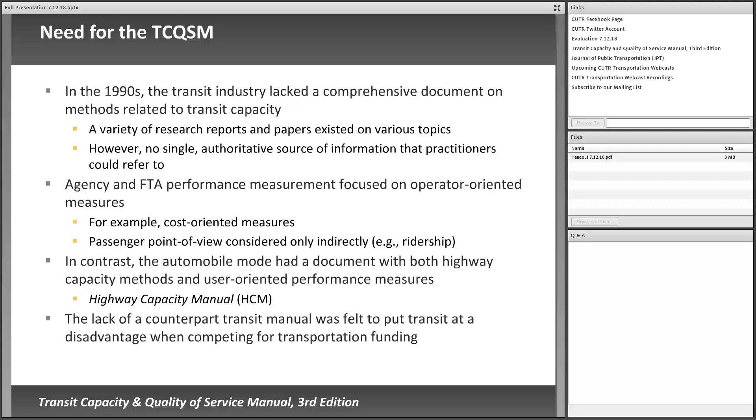In contrast, back in 1950, the auto mode had the first edition of the Highway Capacity Manual and its associated capacity calculation methods and user-oriented performance measures. And hence there was a strong feeling that there was a need to have a transit manual as a counterpart when competing for transportation funding.

So in terms of the TCQSM development, there have been 3 editions to date, starting with the first edition in 1999 that was just published as a web document. At that point in time, it just was a synthesis of the previous research. It did introduce a quality of service framework for the passenger's point of view for the first time. The second edition, which emerged 4 years later, actually applied the quality of service framework, incorporated some gap-filling research, added a chapter on ferry capacity, and at that point in time became TCRP's best-selling report.

And then 10 years after that, in 2013, the current edition, the third edition, was published. At that point in time, there was work done through a series of focus groups to start to get input from users of the second edition, what they would like to see in the next edition, what were some of the shortcomings of the second edition, what added things should be addressed. In the third edition, there was also some added TCRP research that was funneled into the third edition.

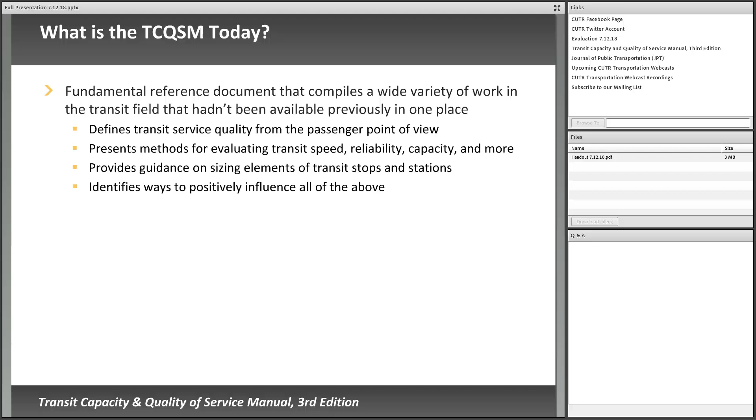The intended audiences are several, ranging from transportation planners to traffic engineers, transit operational staff, design engineers, researchers, and students. Several universities, particularly those teaching graduate transit planning classes, are now using this as a primary textbook for its ability to provide a lot of information and guidance on the basics of how to evaluate transit capacity and quality of service. Another key thing is that the document includes all conceivable transit modes.

In terms of potential applications, we've identified seven of them on this slide, ranging from training staff new to the industry, to university students. It's a very important reference document. There is a glossary, the most comprehensive glossary related to transit terms that has been developed. It provides guidance on use of simulation, application of transit preferential treatments on urban streets, how to incorporate passenger quality of service and service standards development, how to apply the concepts to do service evaluation, what-if questions. There are a lot of examples in the document illustrating how to apply the principles and methodologies included, for planning and design applications ranging from sketch planning all the way into alternatives analysis, as well as specific modal facility design.

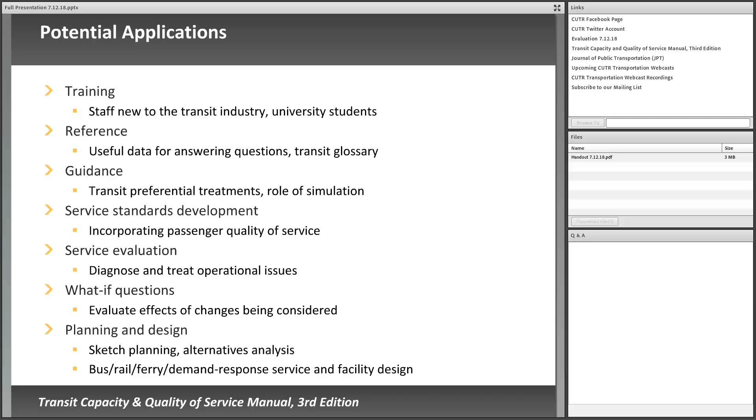As I mentioned, there are five key concepts presented in the manual. The first one is quality of service. In this manual, it's intended to reflect the passenger's point of view, and it's intended to supplement operator cost-based measures that historically had been applied by agencies to evaluate the effectiveness of their services. Again, it's critical that there be a balance between the service passengers would ideally like to see, and what operators can afford to provide given the overall service demands.

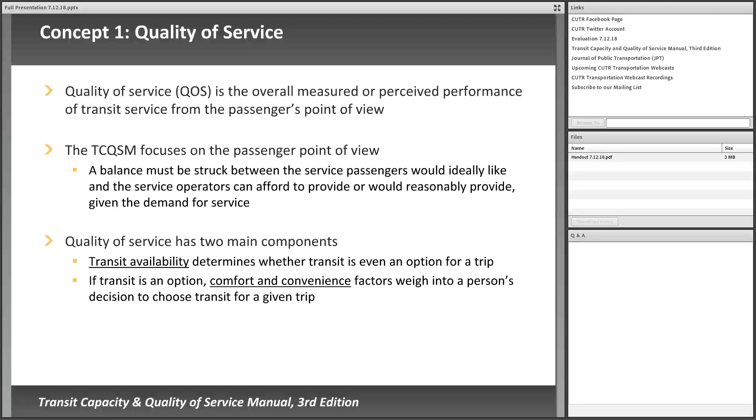Quality of service has two main components: transit availability and comfort and convenience. Availability is whether transit is even an option for a trip, and if it is an option, what are the comfort and convenience factors weighing into a person's decision to choose transit for a certain trip.

Moving on to capacity - there are various definitions of transit capacity, but the basic concept is to identify the maximum number of vehicles, persons, or both that can travel past a particular location in a given period of time under specified conditions. This ranges from maximum or theoretical capacity, which normally isn't used for planning and design - because maximum capacity assumptions would result in unstable operations, similar to the level of service F scenario on the highway side - versus what's known as design or achievable capacity, which is really the focus of the TCQSM procedures.

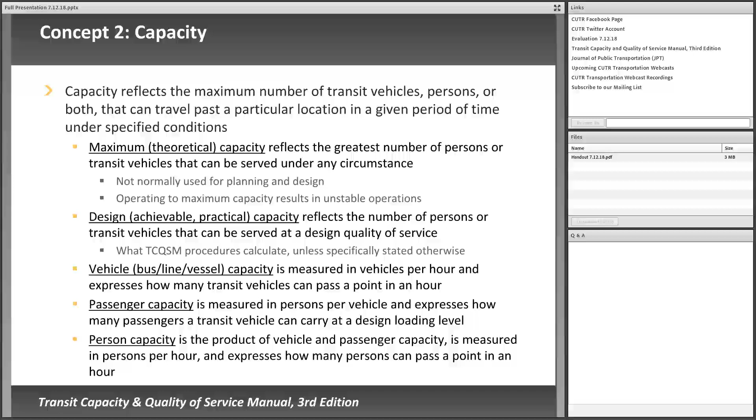You also have capacity broken out by vehicle type, whether it's a bus, a rail line, or a ferry vessel. Also, passenger capacity for certain types of vehicles for various modes, and then multiplying vehicle capacity times passenger capacity to get person capacity. All of these are further identified with respect to each of the modes in the document.

Concept 3 relates to speed and reliability. It's not addressed in the title, but speed and reliability are certainly influenced by transit capacity. Even though small and mid-sized agencies generally don't have capacity issues, speed and reliability are important considerations for agencies of all sizes.

Travel time and reliability do have an influence on mode choice and satisfaction with transit service. Speed and reliability influence the number of vehicles needed to provide service on a route at a given headway, which then impacts route operating costs. Reliability is being addressed in a current TCRP project, the A-42 project, which is assembling a reliability guidebook related to fixed route bus service that will serve as an input into the 4th edition of the TCQSM.

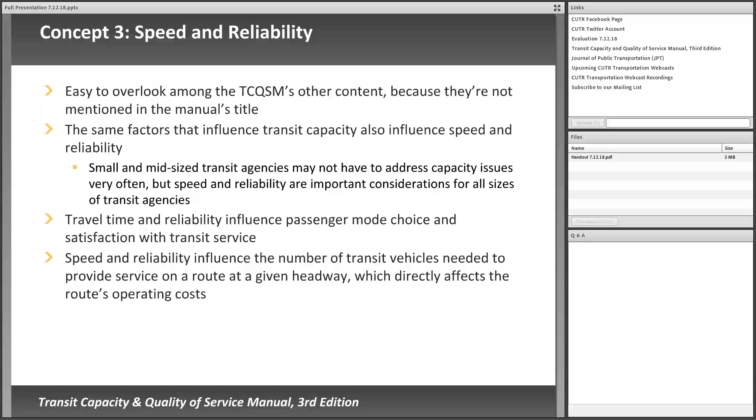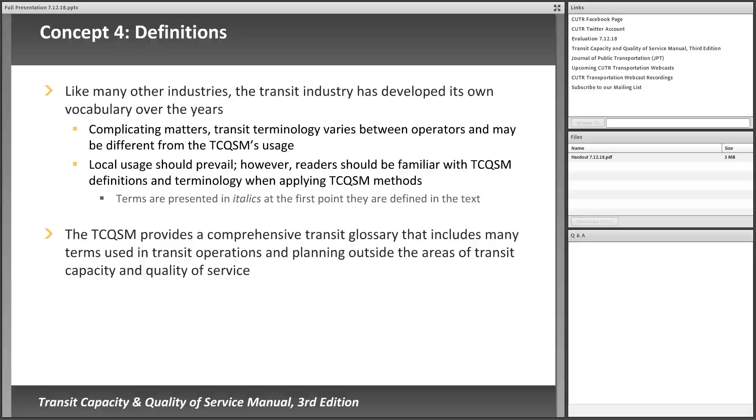Definitions as a 4th concept. The manual has, as I had mentioned before, the most comprehensive glossary of terms in the industry in any document. One of the things it also provides is guidance with respect to applying default values for different concepts and measures versus local values if available, stressing that local usage should prevail. But a very interesting section with respect to definitions in the document.

Local data: the manual over time has evolved to provide a real good source of physical and operating characteristics of a wide variety of transit modes: bus, rail, ferry, ropeway, and with respect also to ridership associated with different modes and levels of service, as well as applications of equipment and technology and the like.

Right now, the 4th edition, as envisioned when it's put together in the next few years, will probably include a component on automated vehicles and connected vehicle technology, which wasn't in play back when the third edition was put together. But again, illustrating that local values should be applied as inputs to TCQSM methods where possible, though there are a series of default values available.

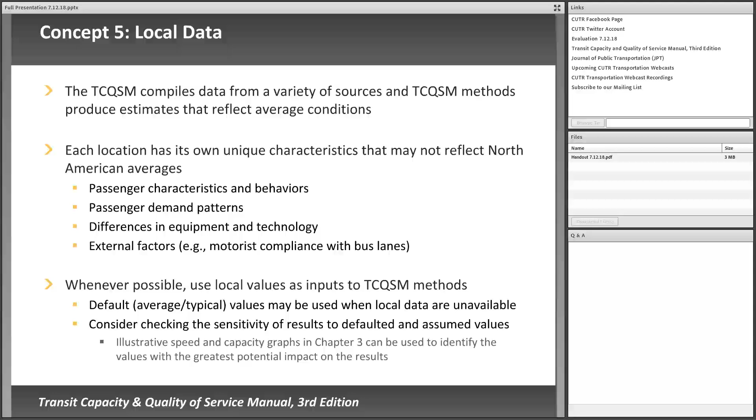So what's included in the TCQSM? There's a total of 12 chapters broken out into 4 major sections. There's a user's guide up front, which is very helpful, and then 3 chapters related to concepts, modes and services, operations, and quality of service, and then 6 chapters related to modal calculations of capacity, as well as a quality of service chapter across all of the modes, and then 2 reference chapters, one a glossary and then an index of terms.

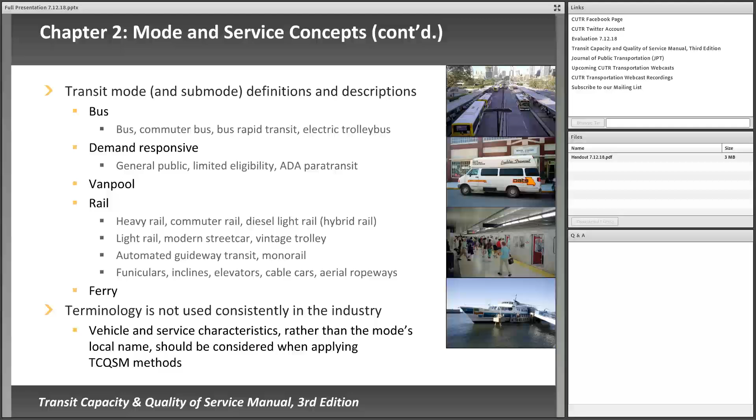It breaks out mode and sub-mode definitions for different types of bus service, breaks out demand response service from fixed route bus, van pool, all of the potential rail modes, as well as ferry service.

It also talks about operating these modes in different operating environments: mixed traffic, semi-exclusive, exclusive, grade separated. For example, semi-exclusive would include what's known as the BAT lane concept that's being applied related to quite a few of the bus rapid transit lines around North America, where you've got right-turning vehicles sharing the lane with buses. That's addressed, as well as these others.

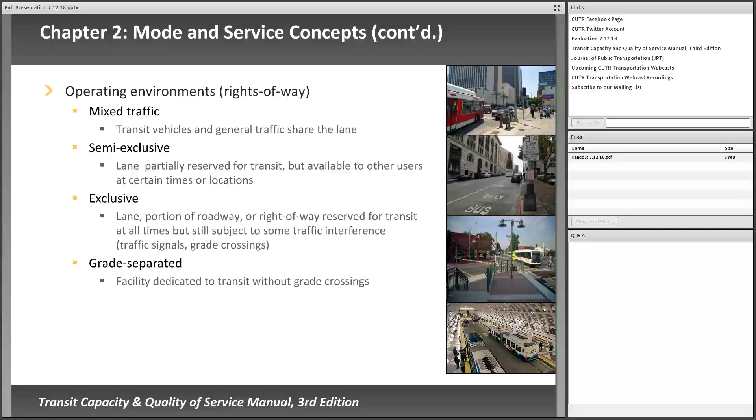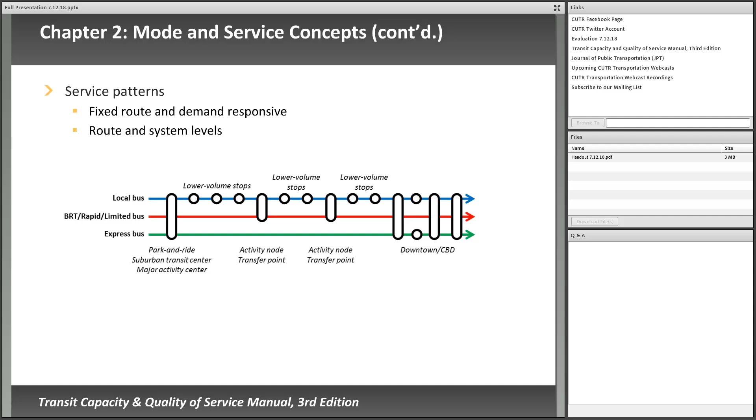Different service patterns are discussed. This graphic on this slide shows you differences in stop locations with respect to local bus, bus rapid transit or limited bus service, and express bus.

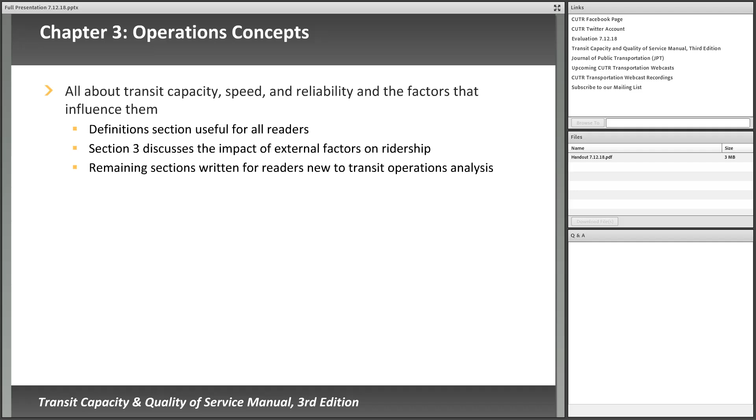Moving on to Chapter 3, Operations Concepts. Again, the focus here is talking about all of the capacity, speed, and reliability concepts. It includes estimating impact of external factors on ridership.

Why is transit capacity important? Well, certainly, as I had mentioned before, the factors that influence capacity also influence speed and reliability, which subsequently impacts operating costs, passenger satisfaction, and in the end, ridership.

It helps with respect to managing passenger loads and design standards for that, understanding the impact of operational changes that impact dwell time and the speed and capacity. Special event service planning as well as something that's addressed in the manual in this particular section.

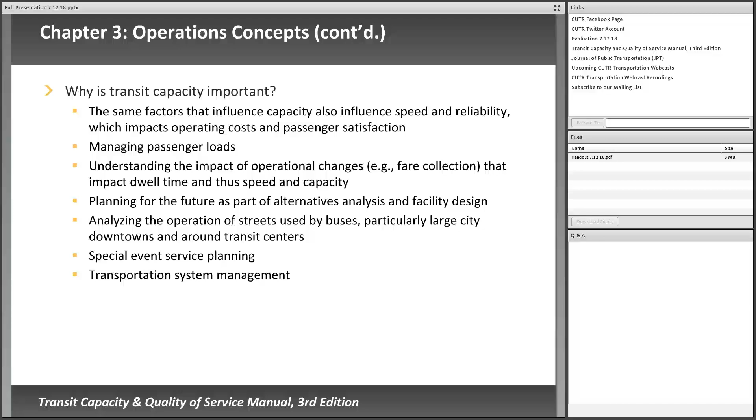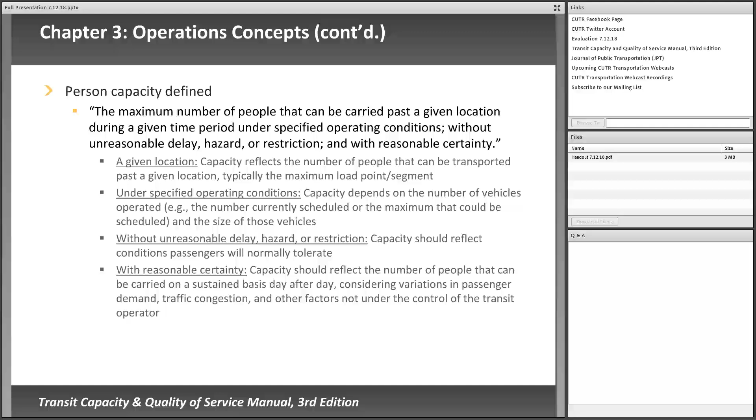Person capacity, I've already talked about that. Again, it's the maximum number of people that can be carried past a certain point under a certain time period. And again, all of the factors involved with that particular definition.

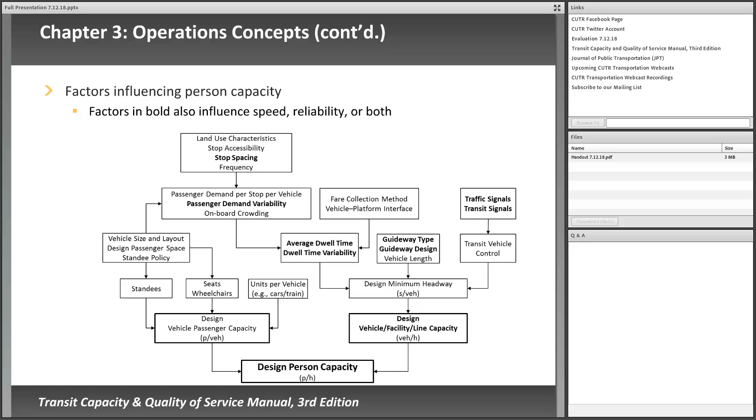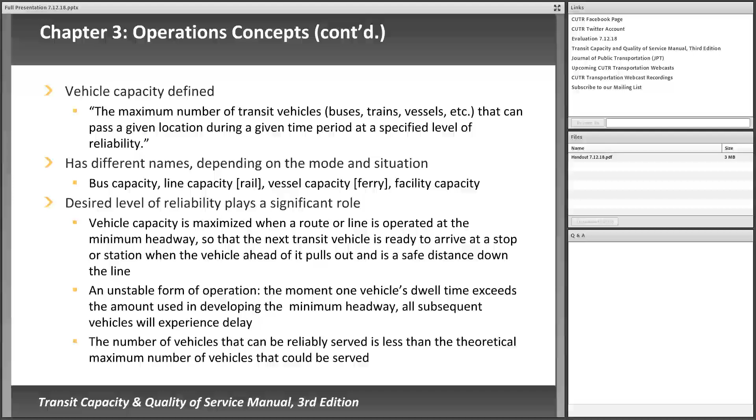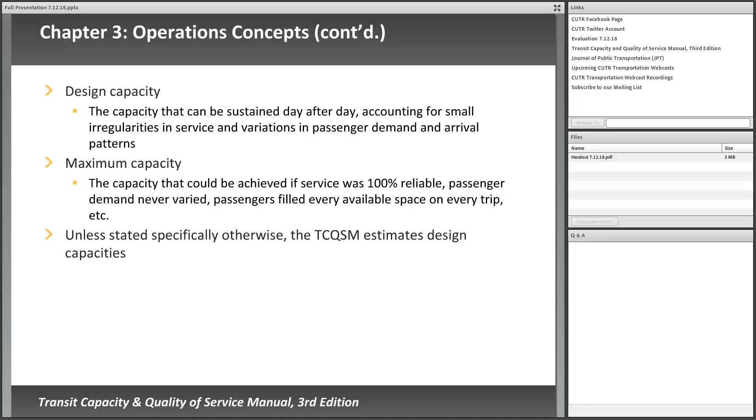And then those combined would be design person capacity. So vehicle capacity, I've already defined that. Again, it's defined by different names based on the mode and situation. You have line capacity, typically identified for the different rail modes, vessel capacity related to ferry and the like. And again, I've mentioned the concept of overall design capacity, which the procedures of the TCQSM focus on, versus maximum capacity.

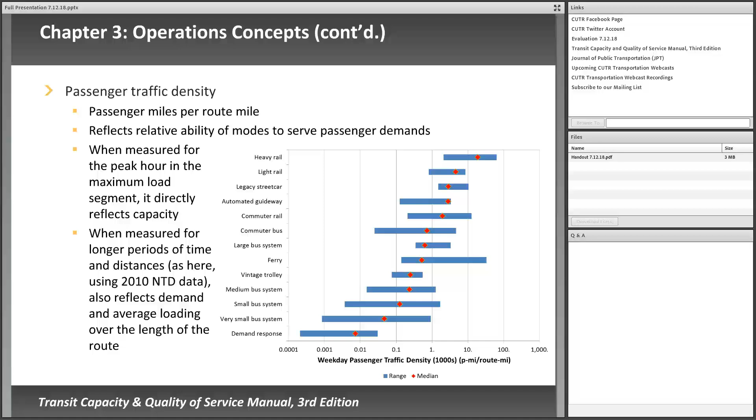When it's measured for the peak hour in the maximum load segment, it directly reflects capacity, and if it's measured for longer periods of time and distances, it's more reflective of overall demand and average loading over the length of a route. But again, there's a series of bar charts related to different concepts in this particular chapter, like this one. And again, another flow chart on various factors influencing transit speed.

You have... grab that. Doesn't want to come down.

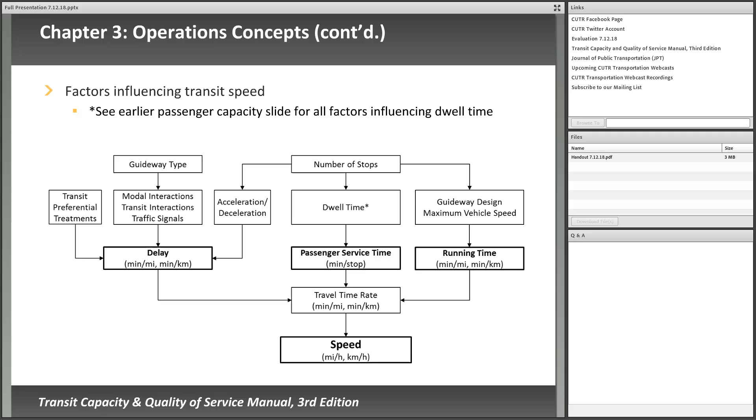Okay, you have everything from a guideway type initially to number of stops and how you would work through the calculations to apply the impact of transit preferential treatments, acceleration, deceleration characteristics to identify overall delay for the vehicle related to the guideway type, and then based on the number of stops, dwell time, which then translates into passenger service time, running time. They all end up identifying a travel time rate and then speed in the end being estimated.

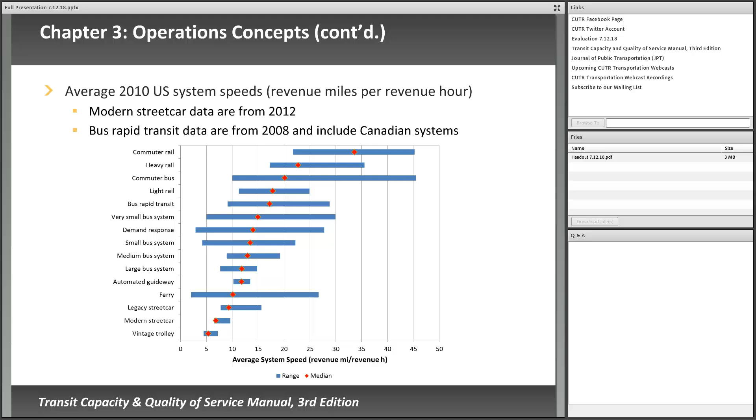And then this is another bar chart that shows the variation, and again, this is back in 2010. Remember, this document was published in 2013, so we have a little bit dated values, but still pretty applicable when you look at things in total. These are values coming out of the National Transit Database at the time, but you can see the average system speed, revenue miles divided by revenue hours for the different modes.

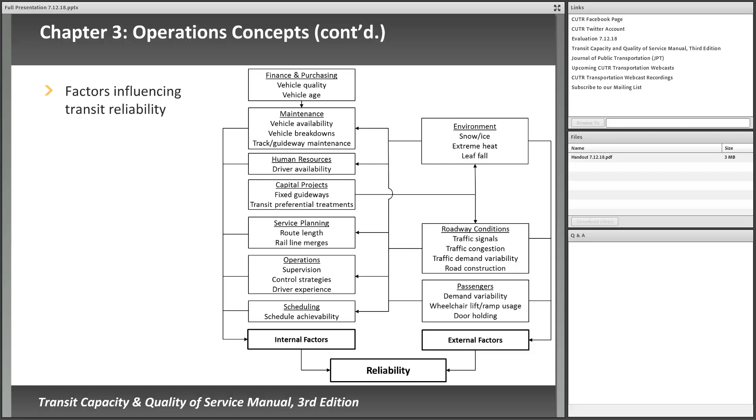And again, this particular chart, which has been modified and enhanced and is going into the new reliability guidebook being assembled, shows you all of the different factors influencing transit reliability with respect to internal factors that the transit agency has under control versus those external factors such as environment and roadway conditions that the agency does not have control over, both of which need to be addressed to address reliability.

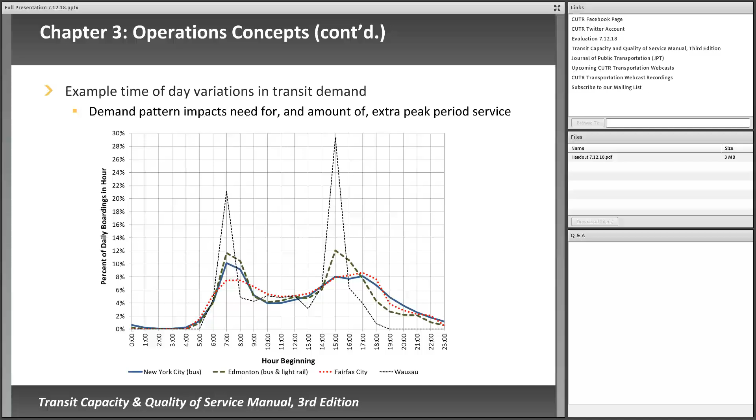And then there's a series of graphics talking about the impact of time of day variations and transit demands, where there are different demand patterns related to different types of services in different locations. You see in this particular slide that Wausau, Wisconsin, that has a particular major manufacturer in town, has more peaking of local bus service than in some of the other cities, particularly New York City. You can see the difference with respect to time of day variation.

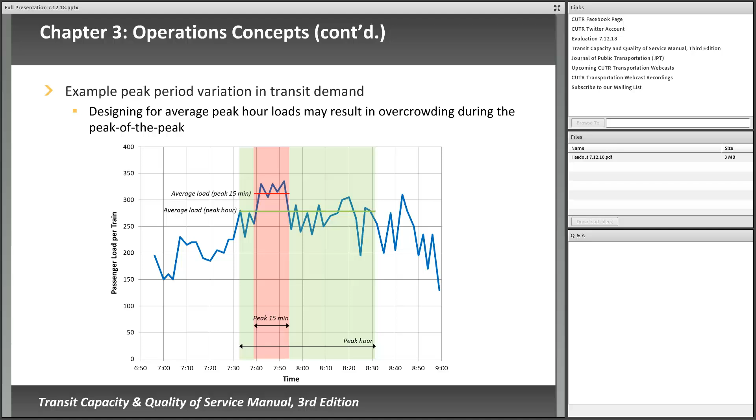It's important to realize that there can be different peak period variation in transit demand. Designing for average peak hour loads may result in overcrowding during the peak of the peak, hence a balance with respect to what you should be designing for.

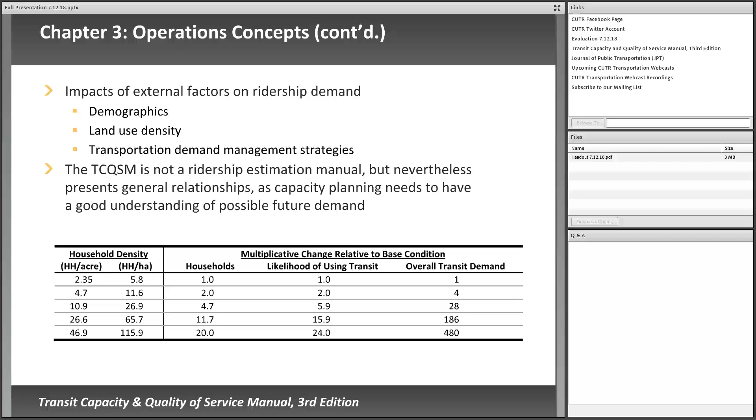Also, what are some of the external factors on ridership demand in the chapter? It's important to realize that the manual is not a ridership estimation manual, but does present general relationships of demographics, land use density, and TDM strategies on potential future demand. This particular table shows the impact related to the base condition of different densities on the likelihood of using transit and overall transit demand.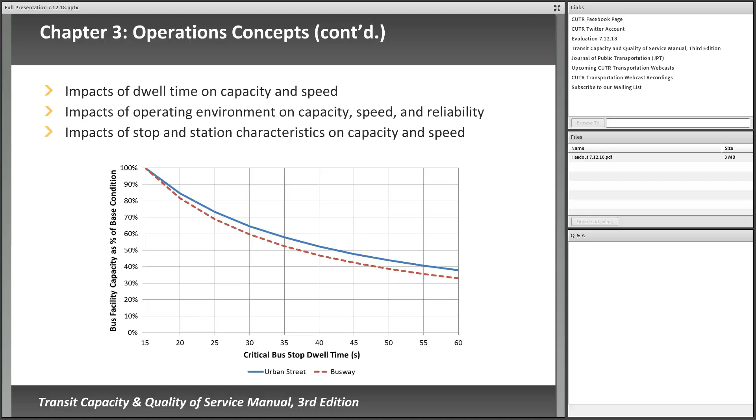Also, how critical bus stop dwell time can impact bus facility capacity, where a critical bus stop, if it has a high dwell time, can really drive the bus facility capacity on a street, impacting the actual headways and the bus bunching involved.

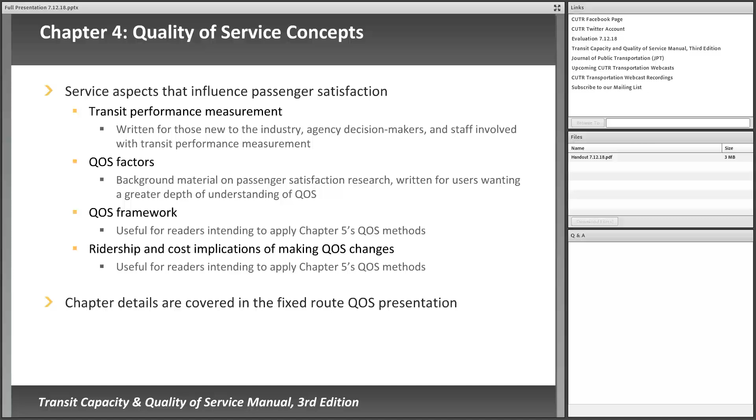Moving on to Chapter 4, quality of service concepts, with respect to addressing a broader set of transit performance measures, and then within that a smaller set of quality of service factors and a framework. Again, quality of service measures based on availability and also comfort and convenience.

How to measure quality of service for fixed route transit, some of the methodologies that have been applied to do sub-area assessment as well as corridor level evaluation, including multimodal transit level of service. There's been some separate national cooperative research program work on multimodal level of service analysis on urban streets. The manual inputted the transit component of that into that particular separate research effort, but that's provided with respect to insights in the manual.

Demand response transit quality of service, particularly with respect to service availability, is identified. And then a lot of potential application examples are included in Chapter 5.

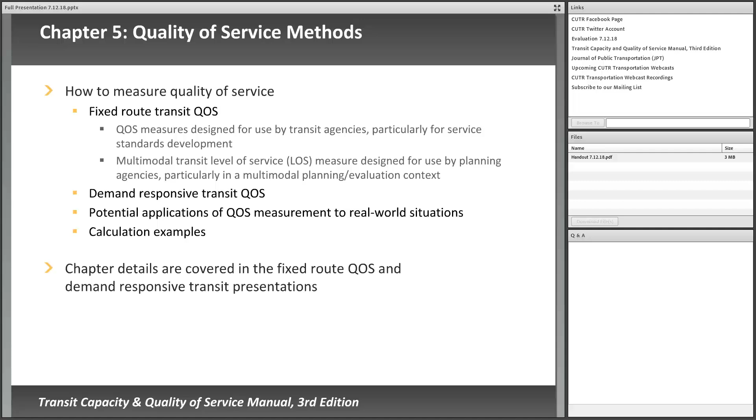Moving on to Chapter 6, bus transit capacity, you have a number of different bus-specific concepts presented, how to address transit preferential treatments. There is an evaluation method to identify bus capacity, a speed forecasting method, as well as different application examples, and also a dwell time data collection procedure, as well as some assessment of the impact of bus bunching on capacity.

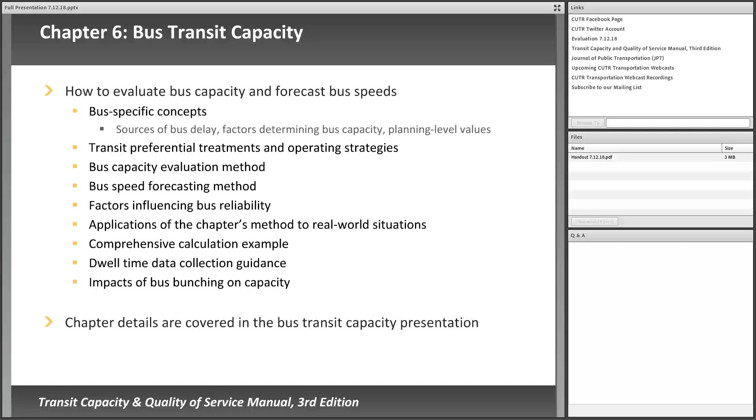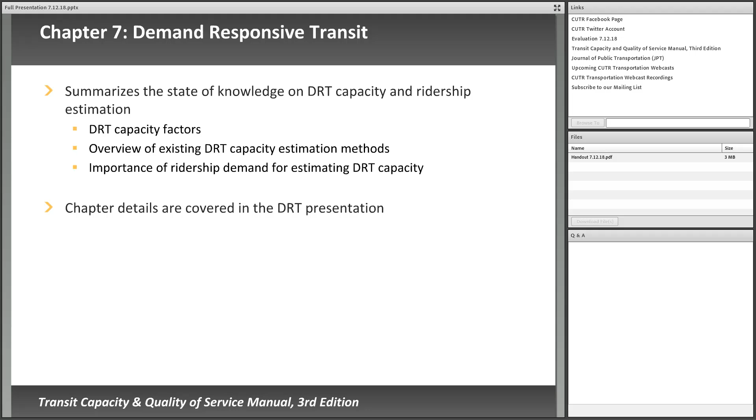Demand response transit includes capacity as well as relating ridership demand to capacity provisions.

Rail transit capacity includes basic fundamentals addressing the impacts that train control and signaling systems, train operations have on overall capacity. There's a general methodology useful for most rail submodes, but specific calculation methodologies related to commuter rail, automated guideway transit, and ropeway, which would be applicable to ski lifts as well as tramways and the like.

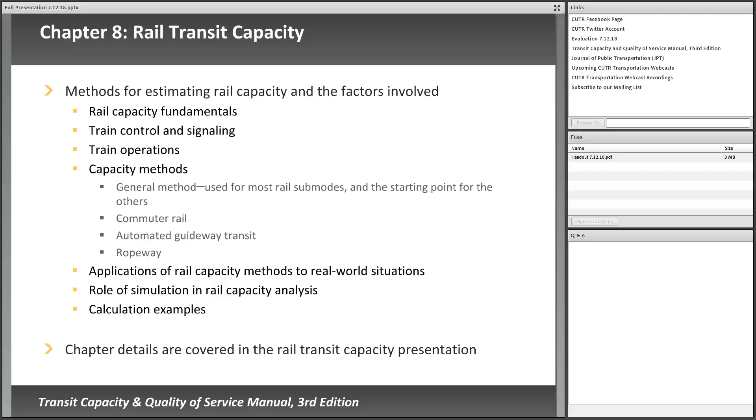And then the role of simulation in rail capacity analysis, given that much of the capacity analysis in recent years related to rail has been moving towards simulation analysis.

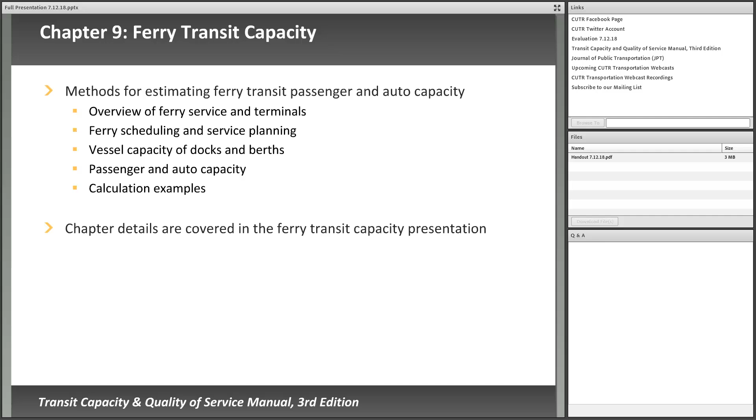And then ferry transit capacity, as I had mentioned, was added for the second edition. It includes an overview of ferry service and terminals, ferry scheduling, vessel capacity at the docks and berths on the vehicle, looking at passenger versus auto ferry capacity with some examples on how to calculate capacity.

Station capacity in Chapter 10 talks about the methods for sizing the passenger circulation elements of different transit stations. It talks about the role of ADA requirements, emergency evacuation requirements, security considerations, the different types of station types and configurations.

Ranging from a simple bus stop all the way up to a major transit terminal, such as the Port Authority bus terminal in New York City.

It talks about different passenger circulation concepts and vehicle circulation and storage, and in the end breaks down different station elements and their individual capacities, everything from a doorway to an escalator, an elevator, a vending machine, a fare gate. All of them have different capacities that impact overall processing capacity through station areas.

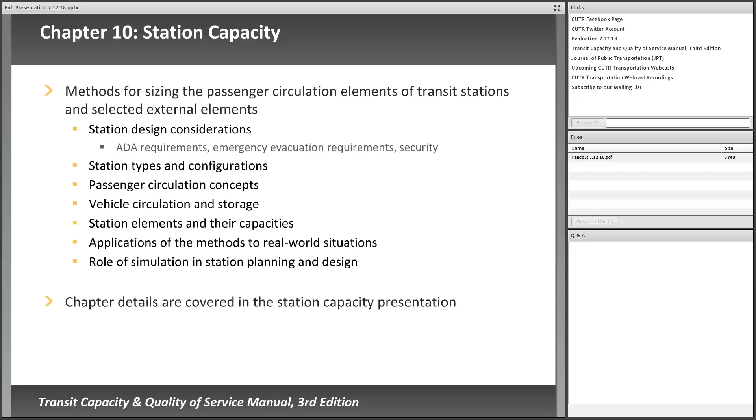Again, more applicable to the larger terminal facilities. And then again, the role of simulation in station planning and design is being applied more often with respect to the larger facility design efforts.

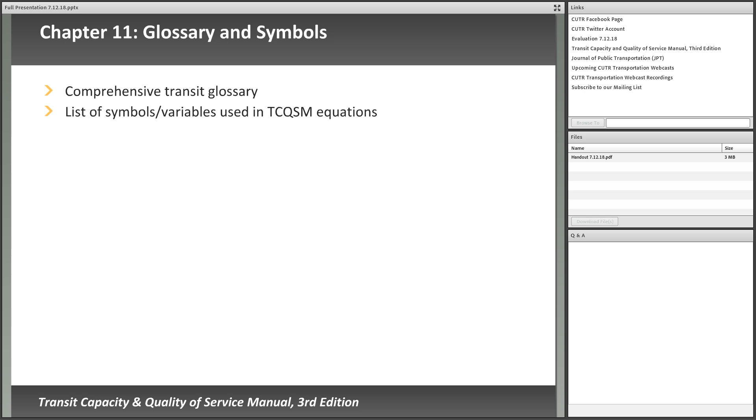And then Chapter 11, the glossary and symbols, has a comprehensive transit glossary.

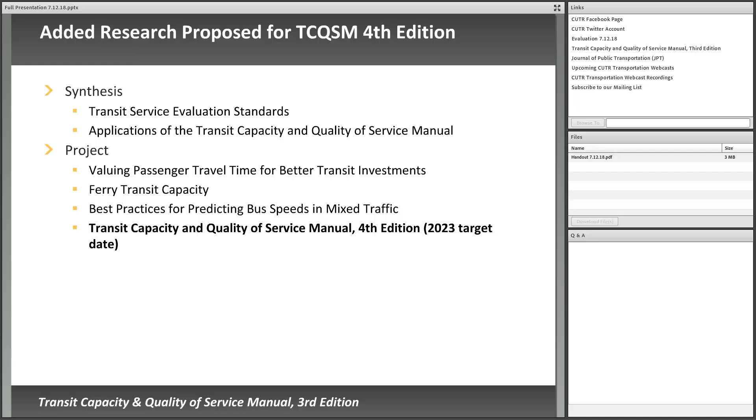So with that, I just wanted to acknowledge a couple of people, in particular Paul Ryus, who is the current chair of the Committee on Transit Capacity and Quality of Service. Vicki Perk, who is our moderator today, serves as the vice chair of that committee and the future chair of that committee.

But Paul was the one that really took the lead in the 3rd edition. I was a co-investigator, he was the principal investigator, and he put together the vast majority of this presentation, which is available for use by everybody to share with your clients and staff. And again, the team that was involved in the 3rd edition included Kittelson and Associates as the lead, Parsons Brinkerhoff, which is now WSP USA, KFH Group, the Texas Transportation Institute, and Arup.

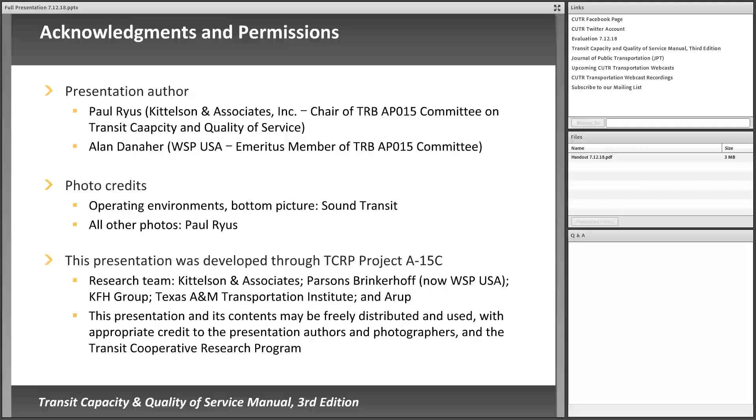And with that, I think we've got about 15 minutes left for Q&A.